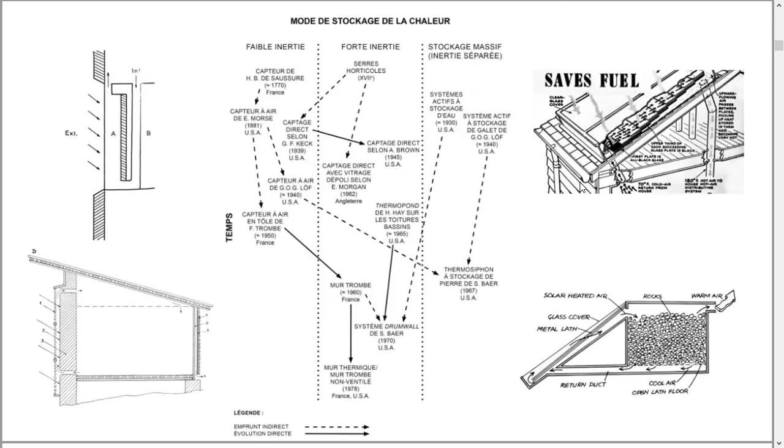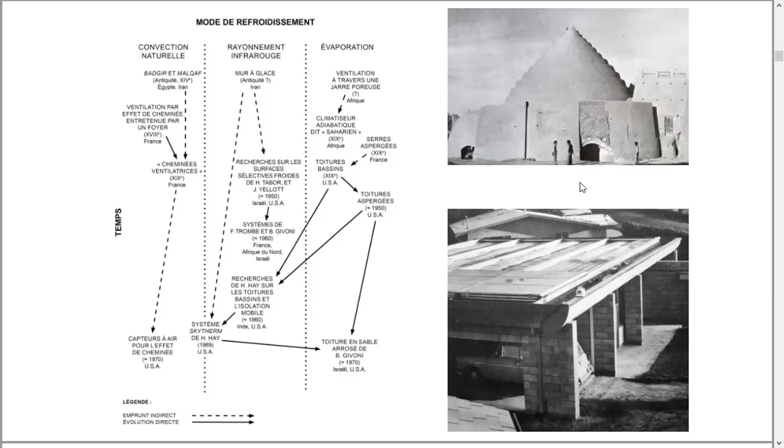And I also studied the history of passive solar cooling techniques, like the SkyTherm system or the roof pond system that was developed by Harold Hay, and how this system evolved after the research, for example, of Baruch Givoni in Israel or in California too.

The subject of my talk today will be about climatic potentials. It comes from a paper I wrote months ago about this idea of climatic potential. It was not a peer-reviewed paper. It was really a paper that was meant to be diffused and read by a lot of people that are not really experts in building climatology.

And the idea was also to try to define this notion of climatic potential as a concept that can be used to understand the climate from another perspective and to say, okay, we can use the climate to our advantage to, for example, cool our cities or our buildings.

The plan of my talk today is this one. First, I will talk about the intuition of climatic potential. Then I will talk about the study of solar potentials after World War II and all the research about passive solar architecture. And then I will finish with the climatic potential nowadays, how we can understand the climatic potential with our modern systems.

So there is an intuitive understanding of the climatic potential when you study, for example, the history of agriculture. When you had to choose somewhere you can grow, for example, vegetables or grapes, you have to choose the best place to do it.

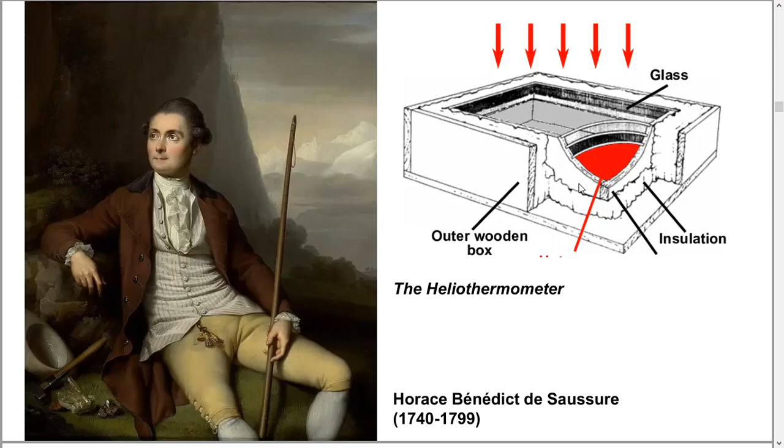Throughout the 18th and the 19th century, there was a growing research field around the use of solar energy. One good example is the solar still of Las Salinas in Chile, which was developed in the late 19th century. This big solar still occupied about 51,000 square feet, and it could produce about 6,000 gallons of water per day. So it's a huge amount of water.

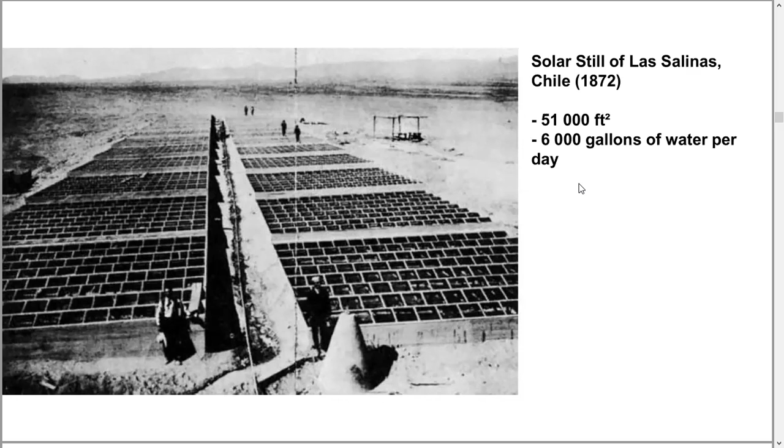And this example shows that there was an understanding of the best place, because Chile has an incredible sunshine quality, mainly in the deserts of Chile. So in the 19th century, there was an understanding of the sunshine quality of Chile, for example, to use it to produce pure water that could be drinkable.

This understanding of climatic potential was really developed by some geographers. For example, in the US, there was the famous geographer Ellsworth Huntington, who wrote a book called Civilization and Climate. And in France, there was also research about this, for example, by Maximilien Sorre, who wrote the book on the right.

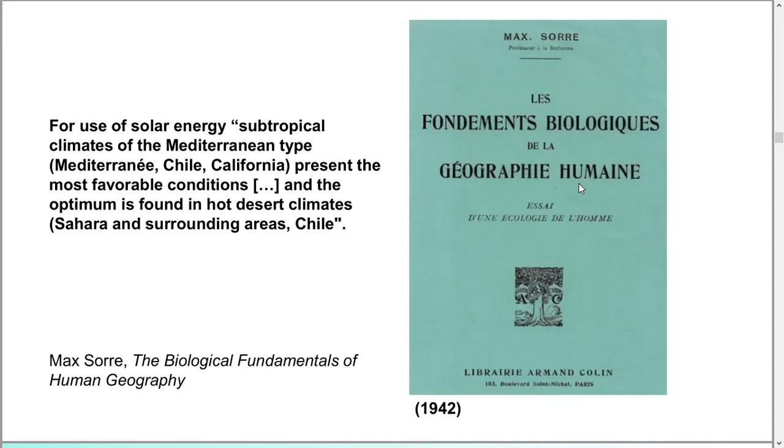And Sorre said that for use of solar energy, subtropical climates of a Mediterranean type, like the Mediterranean, Chile, California, present the most favorable conditions, and the optimum is found in hot desert climates, the Sahara and surrounding areas, and Chile too. So in 1942, there was really an understanding that there are places that are better for using sunshine.

After World War II, there was a growing interest in solar energy. That's what is explained in this book called A House in the Sun, written by the historian of architecture Daniel A. Barber. After World War II, a lot of research was made about the importance of climate and how we can use the climate to our benefit.

There is this important paper called Climate as a Natural Resource, written by the famous meteorologist Helmut Landsberg. In this paper, Landsberg studied how we can use climate mainly to cool and heat buildings. He also said something really interesting: in the 1940s, there was not a lot of data about sunshine in the US.

And he said this, I quote, "The most important gap in our knowledge is the lack of data on the intensity of solar radiation. Observations from about 20 poorly distributed stations in the United States are insufficient to evaluate the radiation factor as an additional source of heat for modern structures using new materials such as glass bricks. This calls for an expanded network of stations measuring solar intensities."

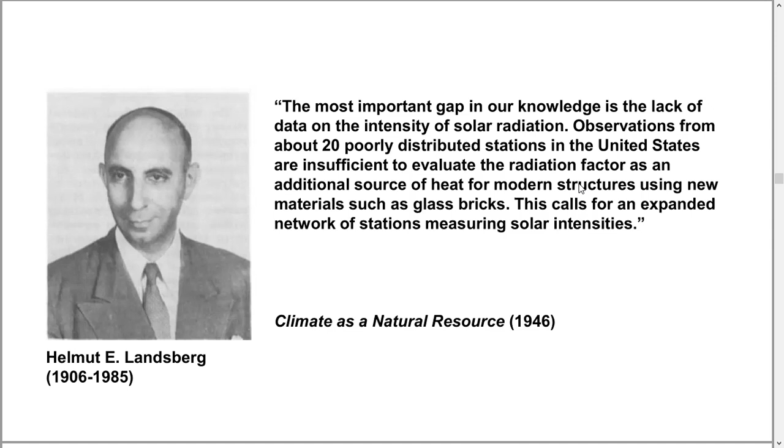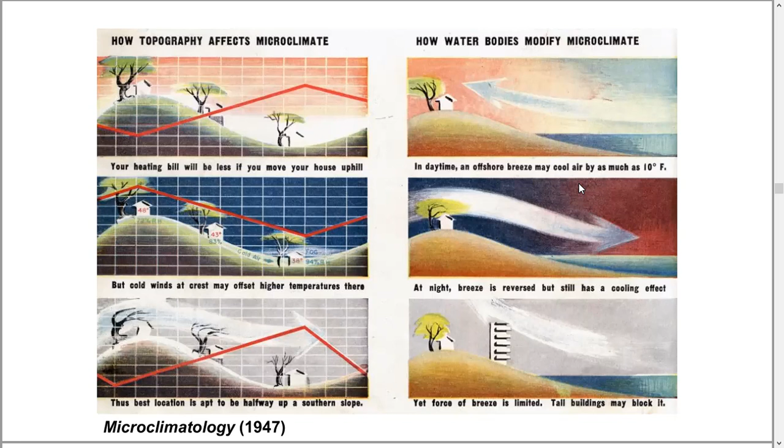And Landsberg, with this observation, tried to develop interest in solar energy, and he published a lot of articles about climatology and how you can use climatology in buildings, and he also published this paper called Microclimatology in Architectural Review.

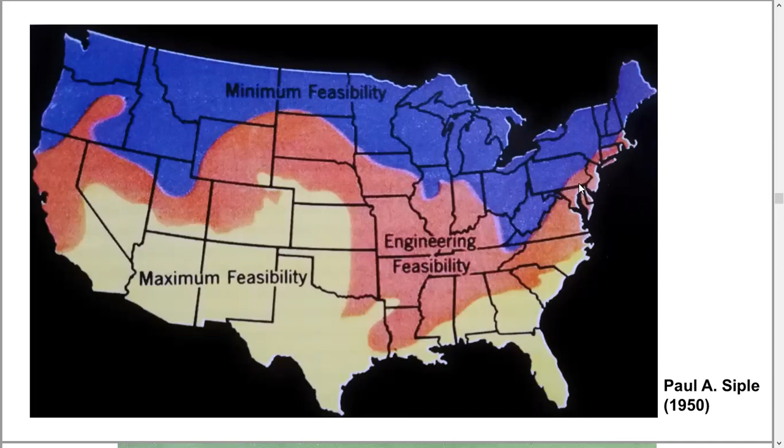Siple that shows 3 different types of zone: where you can use sunshine with maximum feasibility, mainly in the south of the US; where you can really use it with some complex devices, which is called engineering feasibility; and where sunshine is not really that much usable, which is called minimum feasibility.

There was in the 1950s and the 1960s a growing interest in solar energy. For example, this book, Design with Climate, published by Victor Olgyay, talks a lot about the use of sunshine to heat buildings naturally. And there is a publication of really important books, like this one, Direct Use of the Sun's Energy by Farrington Daniels, published in 1964, where you can find a lot of maps about the sunshine quality in the US and the intensity of sunshine. I put some examples on the right.

So there is really development of knowledge about how you can use sunshine for a lot of purposes, to heat buildings, but also to cook food, for example, or to cool some buildings naturally with special cooling systems.

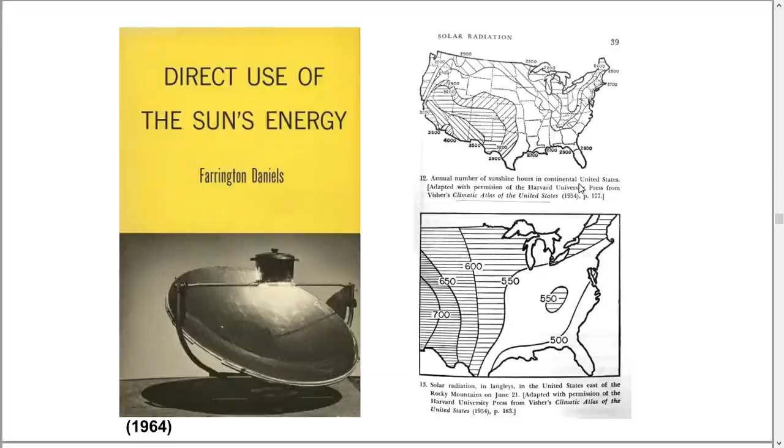Here's a paper that was written by a French meteorologist called Christian Perrin de Brichambaut. It was published in 1976, and it's called Evaluation of a Solar Deposit. And in this paper, you find a lot of very interesting maps of France, with a lot of measures of solar radiation in the different parts of the country.

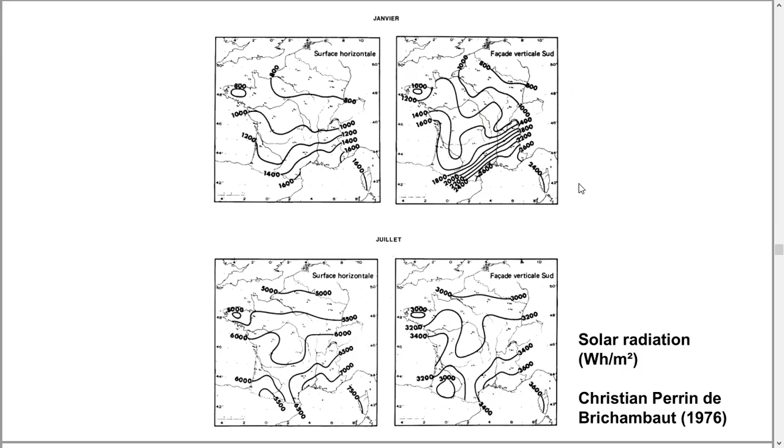And for example, when you see the intensity of sunshine in January on both horizontal and south vertical facade, you can see that there is really a good potential to heat the buildings passively in the south of France, because the intensity of sunshine on the south facade is really important. Here you can see the difference between the south of France and the north of France. There is a huge difference in the solar radiation intensity.

So from this kind of map, you can see really clearly that you can use your south facade as a passive solar collector, and that there is really an important climatic potential to use passive solar heating techniques in the south of France compared to the north.

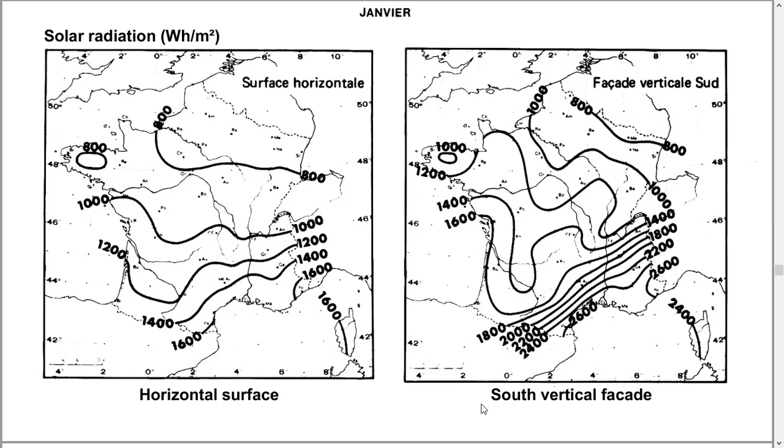There was also in the US a lot of research about the climatic potential to cool buildings naturally. Here I put some pictures of the SkyTherm system. It's the Atascadero house that was made by Harold Hay in 1974. And there was a lot of research about how the sky radiation depends on the dew point temperature. And a lot of research was made by Raymond Bliss Jr., a physicist in Arizona, and also by a very famous scientist who worked on solar energy, called John Yellott.

And when you study the history of the SkyTherm system, you see that there is a lot of exchange between the research of Harold Hay, John Yellott and Raymond Bliss about how you can understand the climatic potential to cool a building by infrared radiation through the sky. And there is a lot of development of techniques to really understand this sky radiation potential. And nowadays, there's still research about this subject.

But you can see with all those works that it was really a very old subject, because there was a lot of research about passive solar cooling techniques that use sky night radiation in the 60s and also in the 70s.

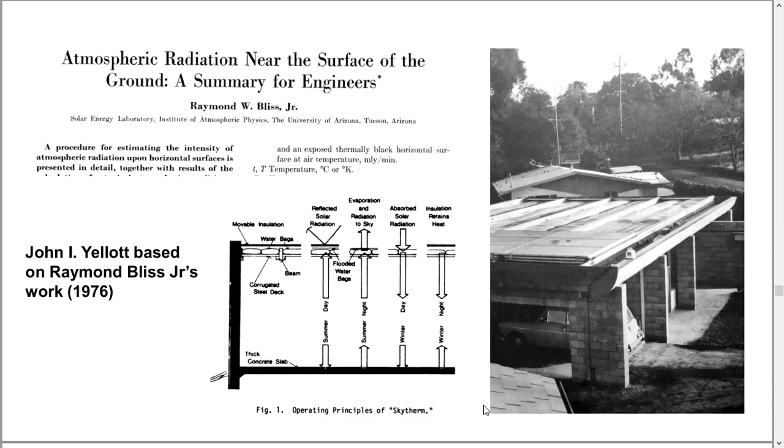One really interesting publication about the climatic potential is this Appropriate Technology Working Atlas for the State of Texas, that was published by the Center for Maximum Potential Building Systems. And in this publication, you find some very interesting maps.

Here's the map that studied the application of the Trombe wall throughout all the state of Texas. And you see this gray area shows that there is a climatic potential to use the Trombe wall in this part, but the climatic potential is really reduced in the southeast part of Texas, because there is humidity in the air, so it really reduces the potential to use the Trombe wall in this part of Texas.

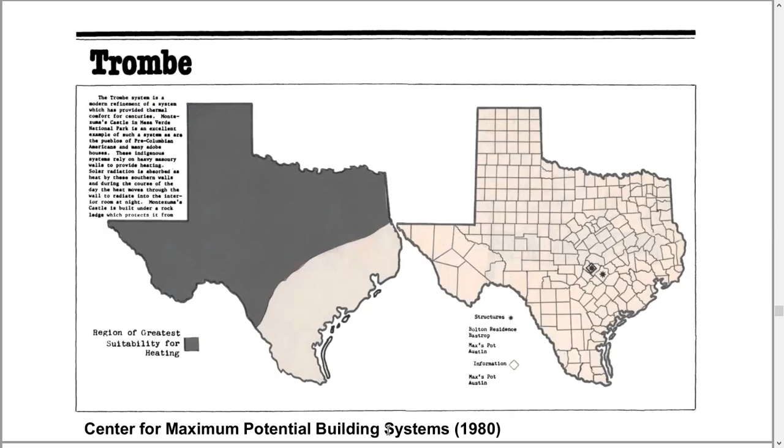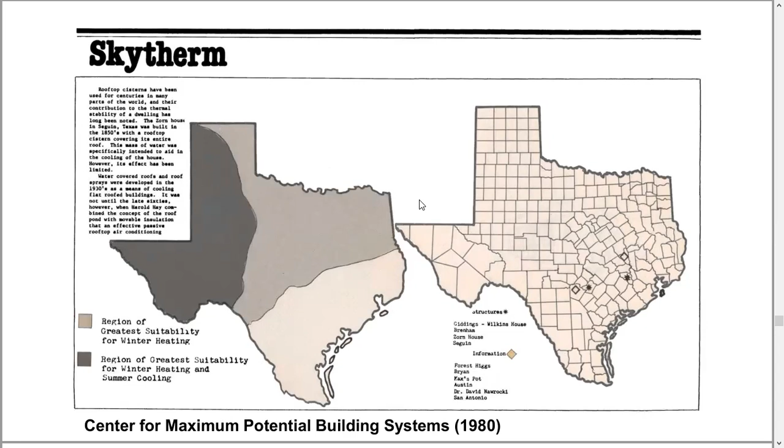There is also a map about the climatic potential to use the SkyTherm system, so the sky night radiation system. And you see the same thing: in the most arid part of Texas, there is a good potential to use these techniques compared to the southeast part of Texas, where the humidity is too important to use the sky night radiation systems in the summer.

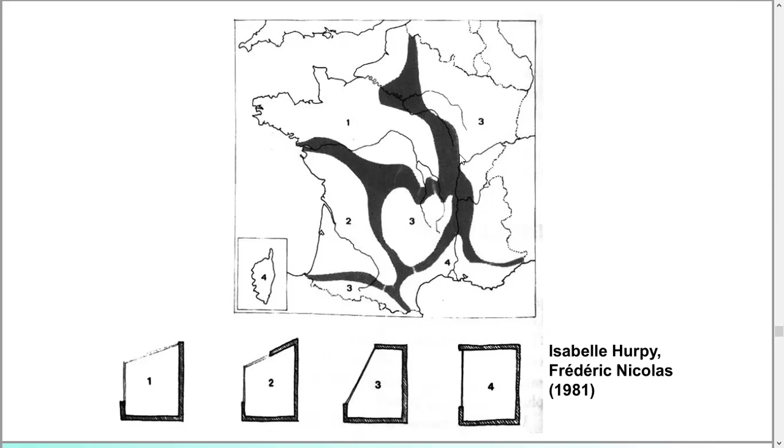So how did this research about climatic potential evolve, and how do we study the climatic potential nowadays? There is still a lot of research about the climatic cooling potential in Europe. Here's an image that comes from the Roof Cooling Techniques Design Handbook, and there is this map that shows the percent of energy savings that you can have with a roof pond system. So it shows the climatic potential to use roof pond systems in Europe. It was published in 2006.

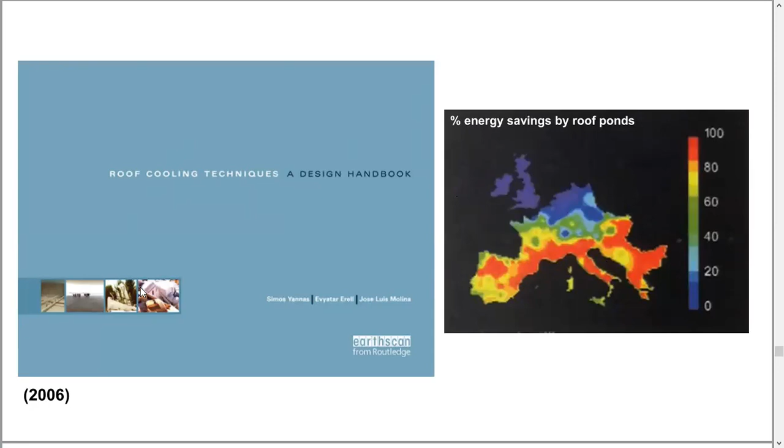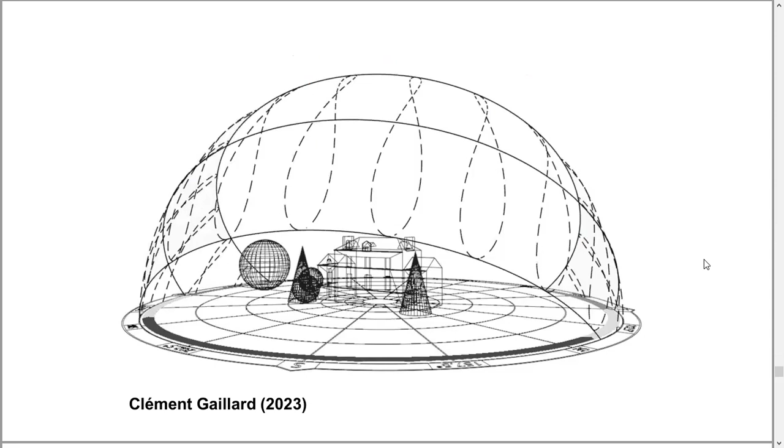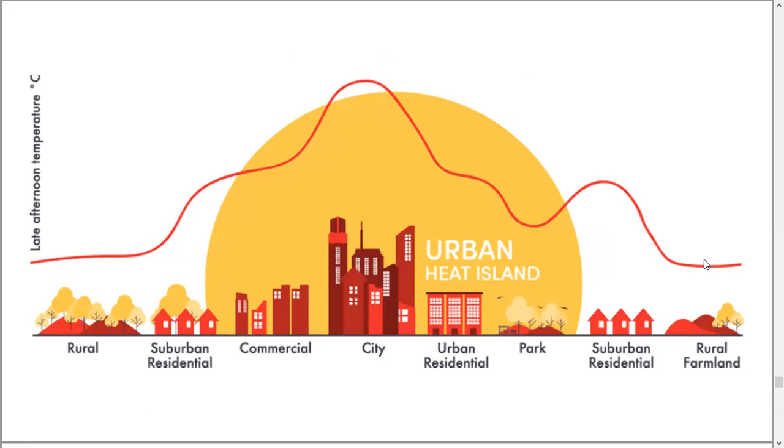And so, for example, I worked with a company which is called Soleneos, and they developed a software to study the climatic potential to cool and to heat naturally the cities and the buildings. And here's a map that we made. So it's about the climatic potential to ventilate naturally the buildings, and the idea was to study two types of urban morphology. So it's this zone, and you see here the intensity of the wind. So the brighter it is, the faster the wind goes.

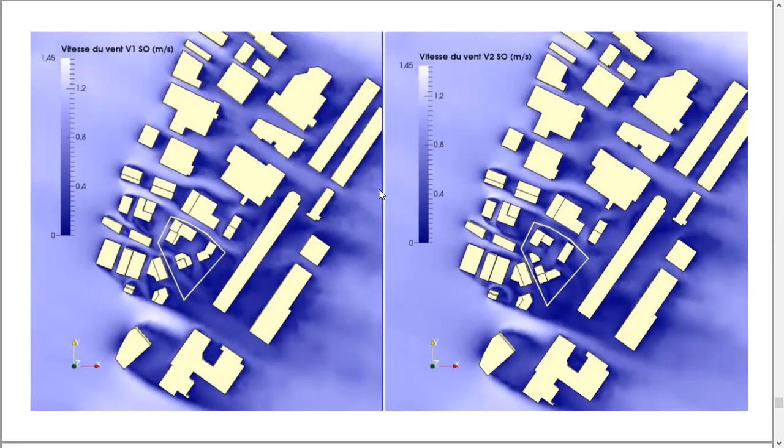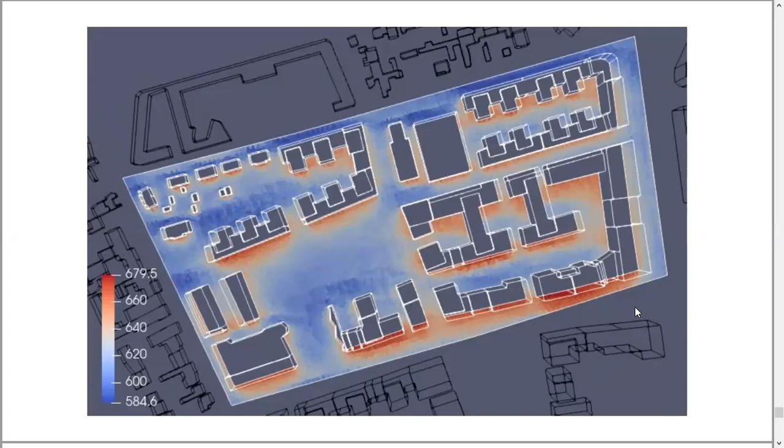And the idea is to study the climatic potential of ventilation inside those buildings. The idea is also to try to find the best morphology to enhance the ventilation inside those buildings. We also made some maps in the neighborhoods about how you can identify the most uncomfortable places. Here's a map to show the UTCI discomfort. So the red parts are the most uncomfortable zones in this neighborhood.

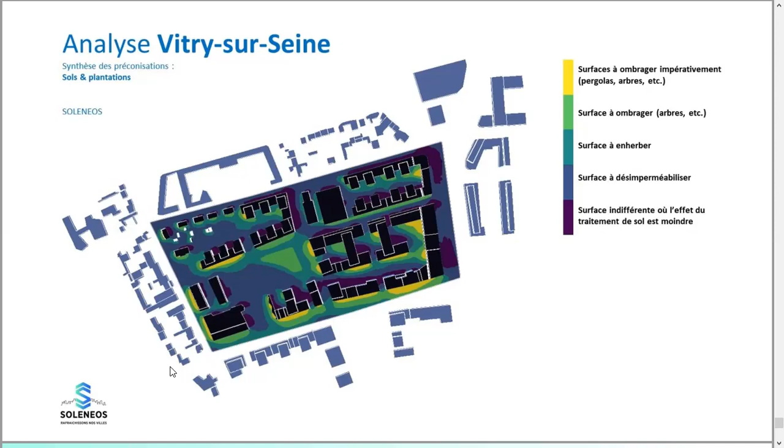And the idea is, with those types of simulation, you can make some analysis, and you can try to understand where you can use, for example, a cooling technique like plants, like trees, and you can use these new types of simulation to understand better where you can use the good technique in the right place. The idea is really to reduce the discomfort during summer, and to reduce the heat island phenomenon, because there's a growing problem in France with heat islands, and there is a lot of concern about this phenomenon right now in France.